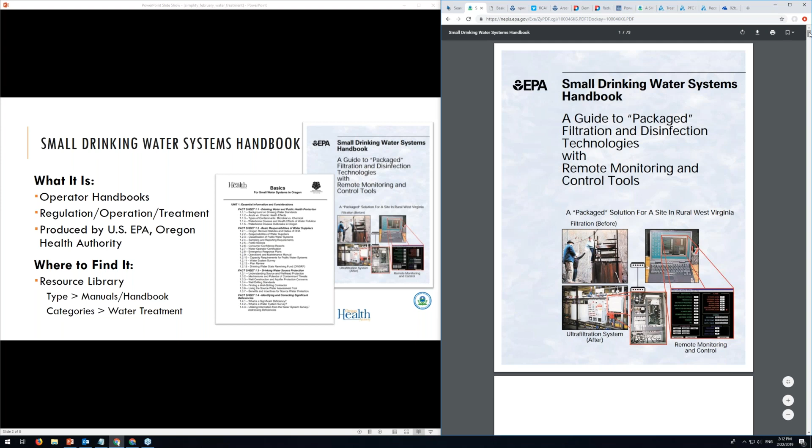I wanted to find a broader manual that doesn't necessarily focus on filtration, but if you're a small system, you might be using filtration, so this is a really handy handbook. Let me scroll through this real quick and show you what kind of information is on here.

Here are some regulatory summaries. I should say this handbook is from 2003, so some information, like the lead and copper rule, is out of date, but all the other information is still the same. All the regulations are still the same, and regulated contaminants are the same. MCLs might have changed, but you can find a variety of other treatment-related technologies on here.

If I scroll all the way down here, here are some examples of treatment technologies that are out there for surface water treatment, disinfection technologies, and filtration technologies. Here's a table of contaminants of concern and possible solutions to treat those contaminants.

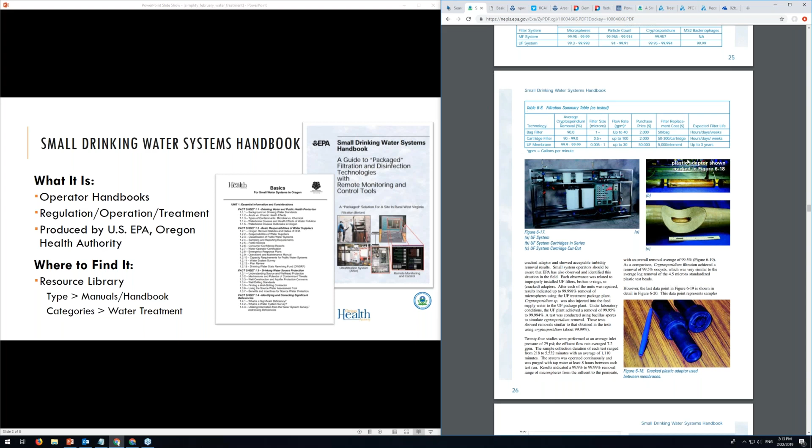The nice thing about this document is there are overviews of different types of filtration. Here's some bag filters. If we go down here, I believe there was UV or ultrafiltration systems and much more.

The cool thing about this handbook is if you go all the way to the bottom, there are some funding and technical resources you can access, like information about the drinking water state revolving funds. All the information is on here, so it is a pretty useful handbook.

The second handbook I want to talk about is from the Oregon Health Authority, covering the essential information a water operator needs to know. It provides detailed information on conventional treatment methods and shows diagrams of how each treatment method works, so you can visualize the process. It also includes information on regulations, sampling requirements, public notice requirements, how to prevent leaks, distribution system related problems, and how to develop an operation and maintenance manual.

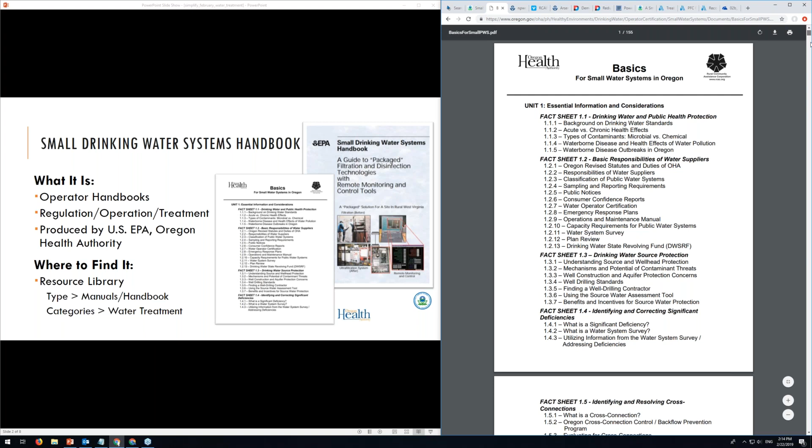This one's 155 pages, clearly much more, including much more information. If you go to the table of contents right here, you can find all that different information.

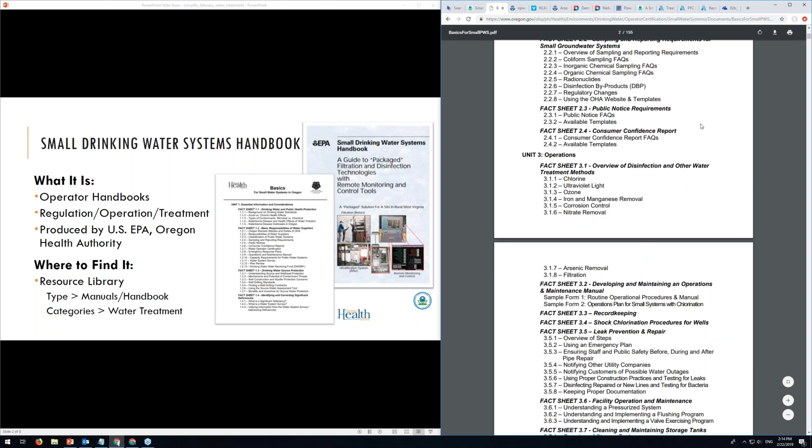These manuals can be found in our document database. The way our database works is we have several types of filters - 4 filters right here, which are categories, types of documents, whether it's related to a specific state, and the actual host of the document.

For example, if you want to find these documents, let's select the type to manual handbooks, and let's select category to water treatment, which is all the way down here. And if we select the host, since we know this is from the EPA and this one's from the Oregon Health Authority, let's go to US EPA.

Right now for manual handbooks related to water treatment from the US EPA, we have 39 documents. If we scroll through all the different pages, here we have the actual document. It should load eventually. Here we go. So this is essentially how you navigate through our website.

You can also search using keywords. I believe manuals, operator handbooks - those should work as well. So that's the basics of how to use our resource library.

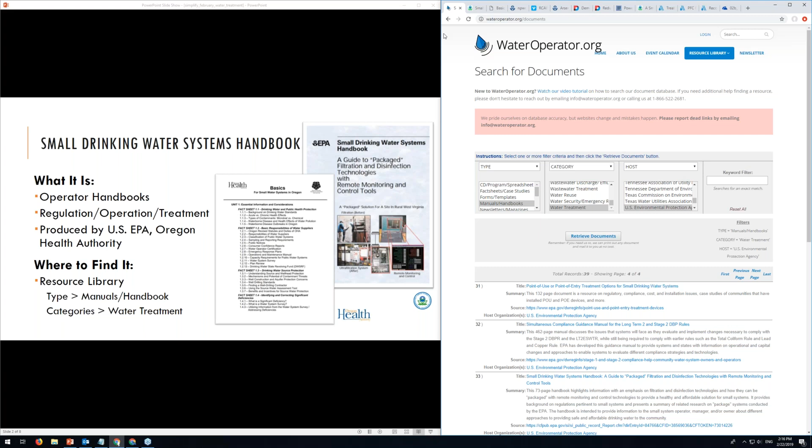Now let's reset this and go to our second resource. The second resource I have today is a handy 7-page fact sheet titled National Primary Drinking Water Regulations, developed by the US EPA.

I'm pretty sure most people have some sort of information on what exactly the MCL of each different contaminant is, but I'm not an operator and I'm not a state regulator, so I don't have all this information memorized. If someone calls me and asks, I have a problem with arsenic, what should I be doing, what are the actual limits I should be looking at, I always refer back to this document and find the information I need.

This fact sheet is handy because it provides information on the actual MCL, potential health effects on people from long-term exposure, and the common sources of where these contaminants come from.

I do have to say, I know some states have lower limits for certain contaminants than the actual federal limit listed here. For example, I know New Jersey has an arsenic limit of 5 ppb, as opposed to 10 ppb, which is listed on here.

And I believe at the beginning of this year, New Hampshire is proposing to lower their limit as well. So this is just all the federal limits, but it's still a handy fact sheet to have.

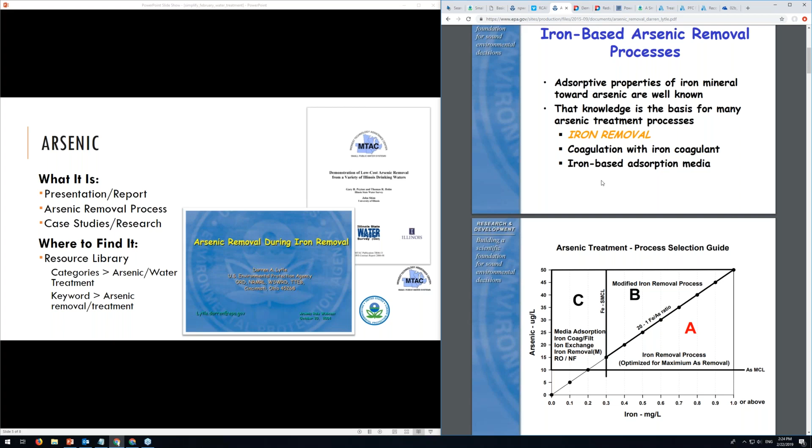When I first started working on this project, my supervisor guided me to this presentation and said if you want to learn about arsenic removal, look at this presentation. It's really helpful, it goes through the chemistry and the process.

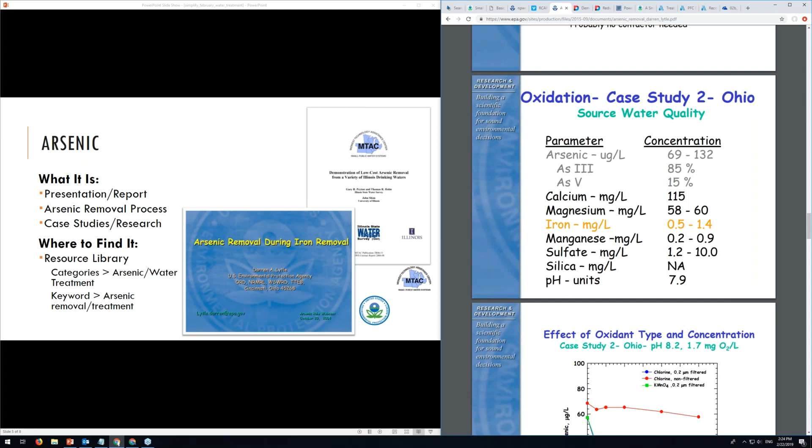It includes case studies of different treatment methods and how effective iron and arsenic removal efficiency is. Different case studies show different results, which helps operators understand what else they might need to add to their facility to remove iron or arsenic, depending on which problem comes up in their system.

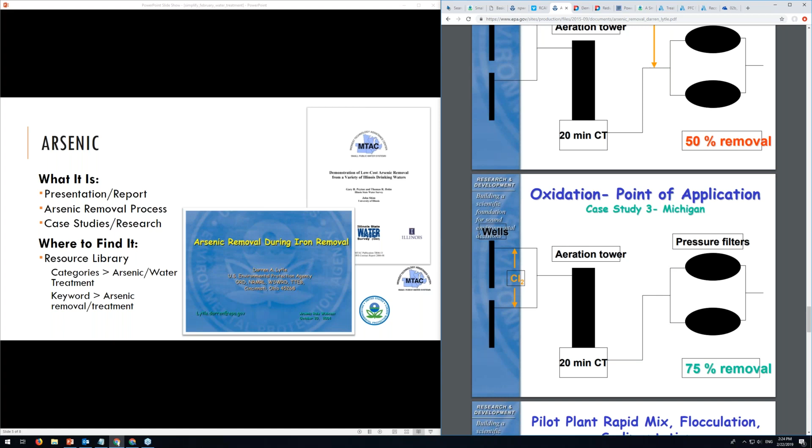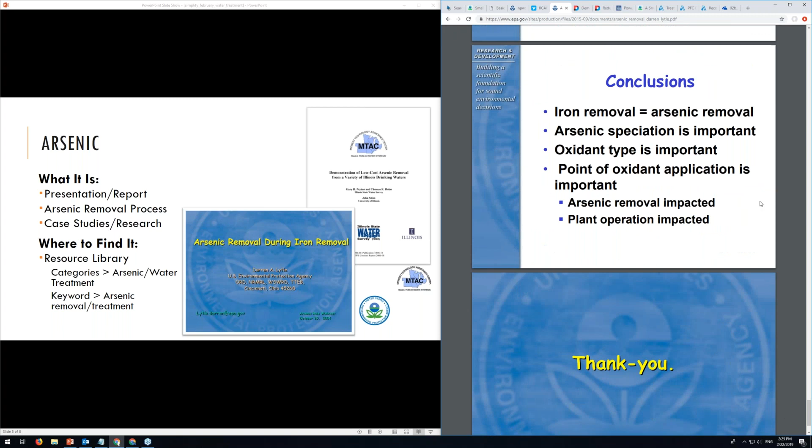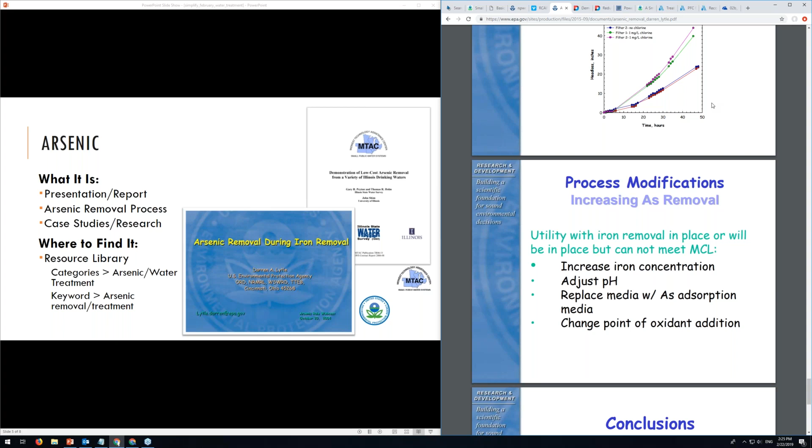Here are actual pictures of the pilot study setups and the conclusions from their case studies. Another arsenic-related resource is a 27-page report written by the Midwest Technology Assistance Center, led by U of I and the Illinois State Water Survey, discussing low-cost arsenic removal techniques from groundwater using the Fenton reaction, treatment efficiency, and cost analysis for the chemicals used.

As I mentioned before, especially in central and southern Illinois, arsenic is a prevalent contaminant in the groundwater. Since we're at the Illinois State Water Survey, and a lot of the work here relates to groundwater, this paper was interesting to read, to see how the Fenton reaction—a treatment technology I've seen a lot in recent treatment technologies—can be optimized and how effective it is to remove arsenic.

Both of these documents can be found in our resource database. I'll quickly show you how to search by choosing a category. We actually have an arsenic category by itself, along with our drinking water treatment category. If we choose arsenic as the category and arsenic treatment as a keyword, we narrow it down to 41 resources, all related to arsenic.

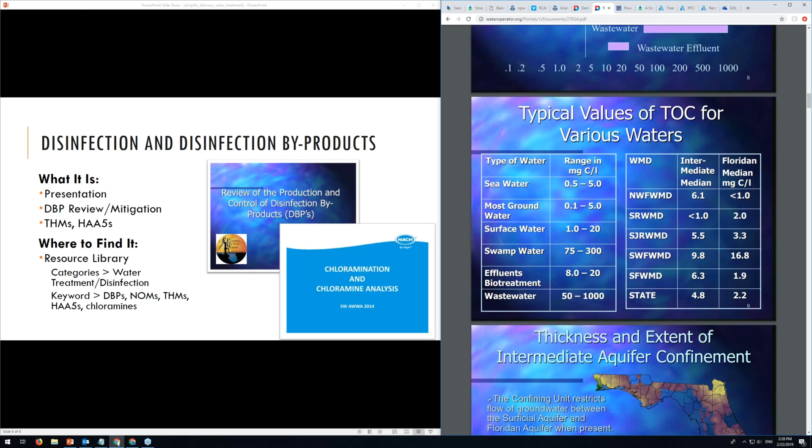When I first started learning water treatment, I knew chlorine was an effective disinfectant, but I didn't know about the existence of DBPs until I started looking at violations. This presentation helped me a lot in understanding how natural organic material, like NOM, is the reason DBPs form, and how different amounts of TOC in various waters can affect DBP formation.

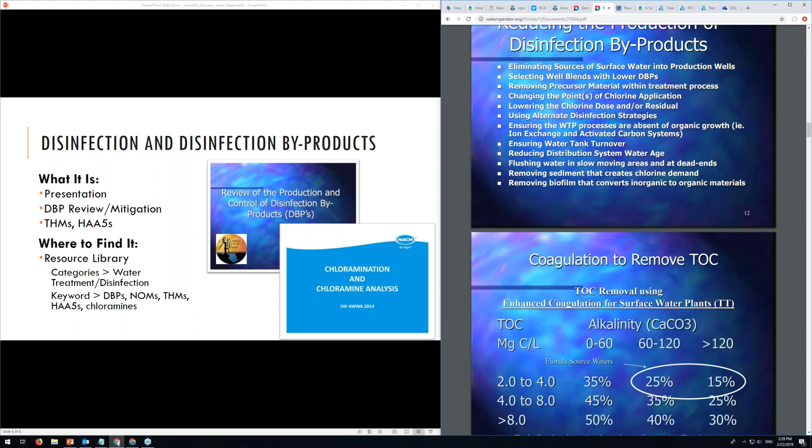It also covers ways to reduce DBPs forming within the distribution system, and how to actually understand a breakpoint chlorination curve, which was really helpful to understand exactly what I was looking at. This presentation is easy to understand, easy to read, and definitely helps you understand DBP formation and how to mitigate it.

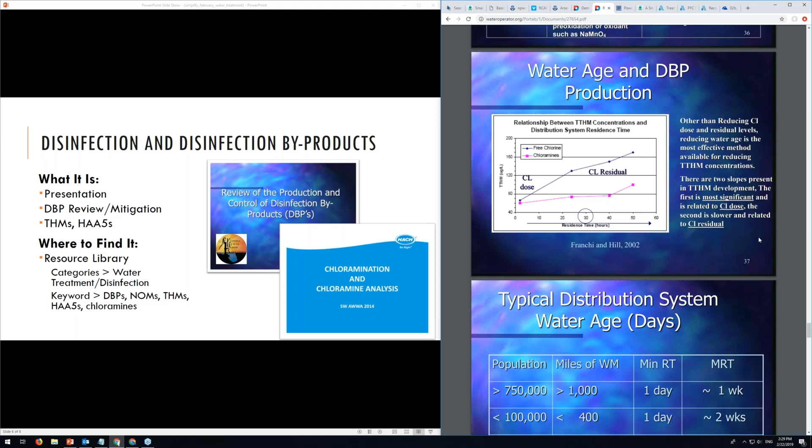Here's information on trihalomethanes and haloacetic acids, and if you go to the very bottom, here are ways to modify your current system to reduce DBPs, along with different factors that affect DBP production. This presentation is really informative.

The second presentation on this slide is on chloramination and chloramine analysis. The previous presentation mentioned chloramines as an alternative to chlorine to reduce DBPs. This one was developed by Hach, a major producer of water test kits, and it definitely lives up to their name—it's helpful and informative.

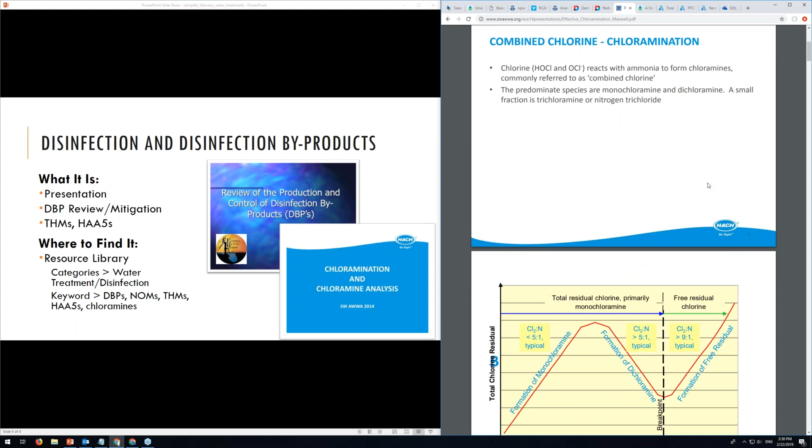It describes the chemistry behind how chloramines work, including information on breakpoint curves, how to monitor and control chlorination, and the chemistry behind how it reduces DBP formation, or how it avoids forming DBPs altogether.

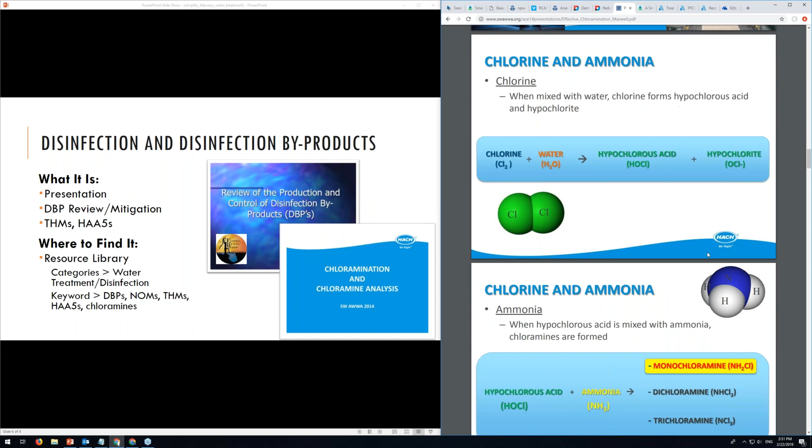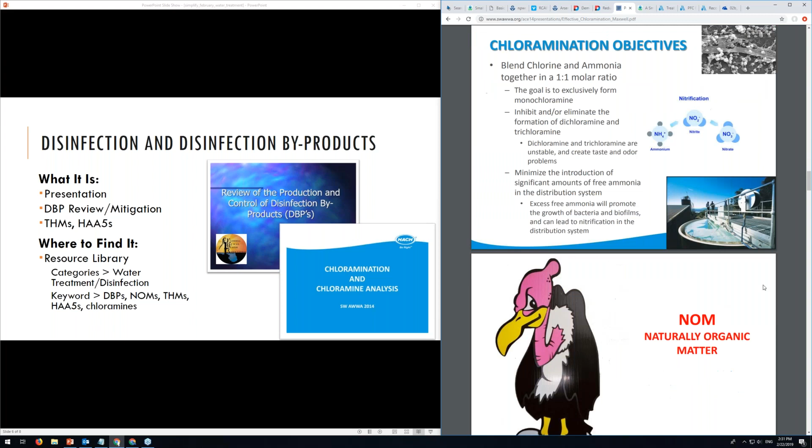So, chlorination, chloramines, the chemistry, and how ammonia works within the whole system—chlorine goes into your distribution system, reacts with ammonia, and form monochloramines, which eventually treat the residual chlorine. This presentation was very helpful in understanding the whole process.

Just as I mentioned before, along with DBPs, total coliforms are a major source of violations for small systems. So the next resource I have is a handbook called A Small Systems Guide to the Total Coliform Rule, developed by the US EPA, and it's designed for smaller systems.

It provides detailed information on how to reduce waterborne diseases using the multiple barrier approach, what kind of monitoring is required under the total coliform rule, and it provides worksheets to help keep track of monitoring and understand test results. This handbook is helpful because it provides the monthly monitoring worksheet, a very useful management tool to help operators keep track of their monitoring requirements and whether they are in compliance with the total coliform rule.

Smaller systems are more prone to violating this because, from reading previous studies, they either forget to maintain their routine sampling or they collect samples incorrectly. This handbook goes through the whole process of why the TCR exists, and why it's important for operators to actually measure for these.

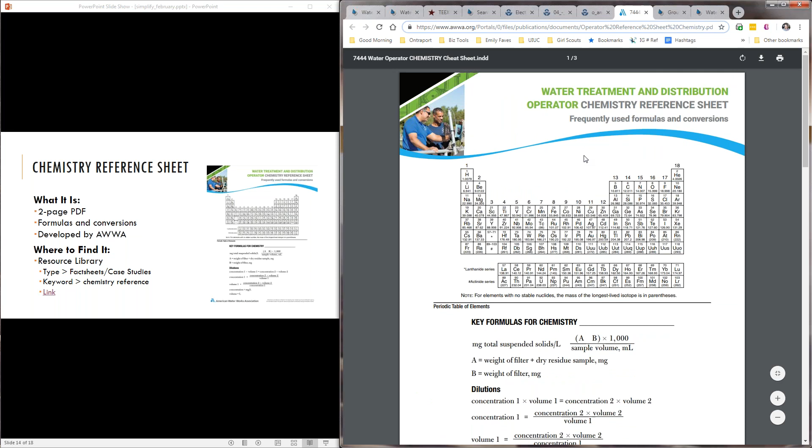So in order to find that, we'll reset our search here. We'll go to type, fact sheets, and we'll use our keyword and do chemistry reference. There we go, and that comes up.

This is a good example of how oftentimes we want to have a place to link to. This particular document, I don't believe, is listed publicly on AWWA's website because they often have things behind their login, but they are freely available documents, so we're linking directly to AWWA's publication of these on their blog.

All right, final example here. This one is a little bit self-serving. This is a groundwater and well care class for non-community water systems. This is a course that we've actually developed and host. It's a 2-hour self-paced course.

Now, we specify non-community water systems because we know this audience, the transient systems in particular, may not be as familiar with how groundwater works, the basics of well care and maintenance, particularly those who just happen to be water system operators because they got into a business or into managing something that happens to have a water system. This course has been pre-approved in 12 states for operator credit, regardless of what type of certification you have.